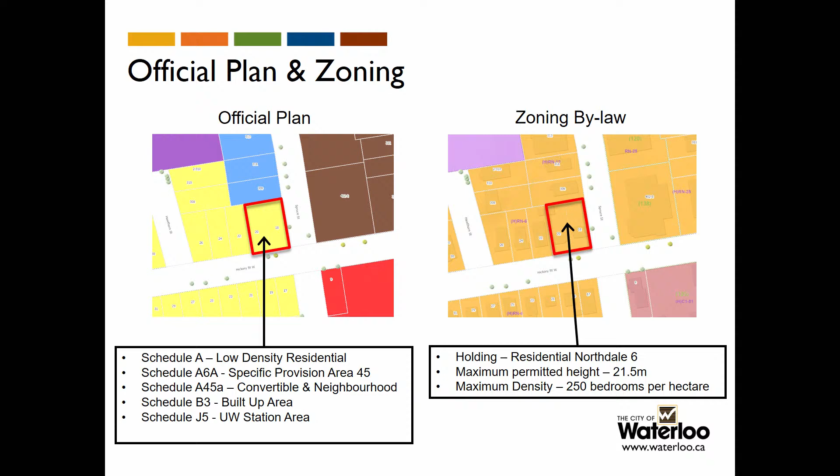In regards to the proposed development, the applicant is proposing to construct 9 3-story connected townhouses with 6 townhouses fronting Spruce Street and 3 townhouses fronting Hickory Street. The development contains 9 units with a total of 26 bedrooms. Each unit will have 3 bedrooms with the exception of 1, which will contain 2 bedrooms.

The applicant is proposing 9 vehicular parking spaces and 9 bicycle parking spaces. Vehicular parking is accessed from Hickory Street, and bicycle parking is located along the first unit fronting Hickory Street along the driveway. At the intersection of Hickory Street and Spruce Street, there will be an outdoor amenity and landscape area for residents of the development.

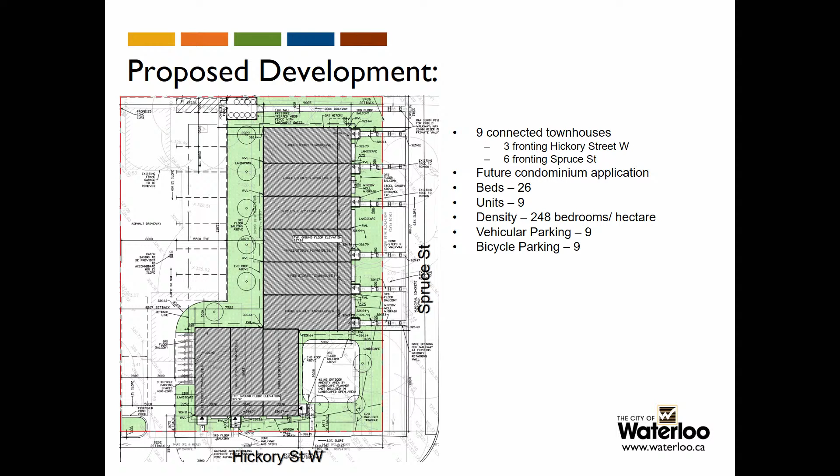In order to facilitate the proposed development, the applicant is seeking 4 site-specific zoning exemptions. 3 of the proposed amendments are technical in nature to recognize the configuration of the proposed development. My next few slides will explain each in detail.

The first amendment relates to the minimum street line setback for a convertible frontage. This amendment is technical in nature due to staff's interpretation of building facade, which speaks to the exterior wall or face of the building abutting a front or flankage yard. Based on the residential Northdale 6 zoning, the development is required to have a minimum of 75% of the front building facade be within 5 meters of the street line for a convertible frontage.

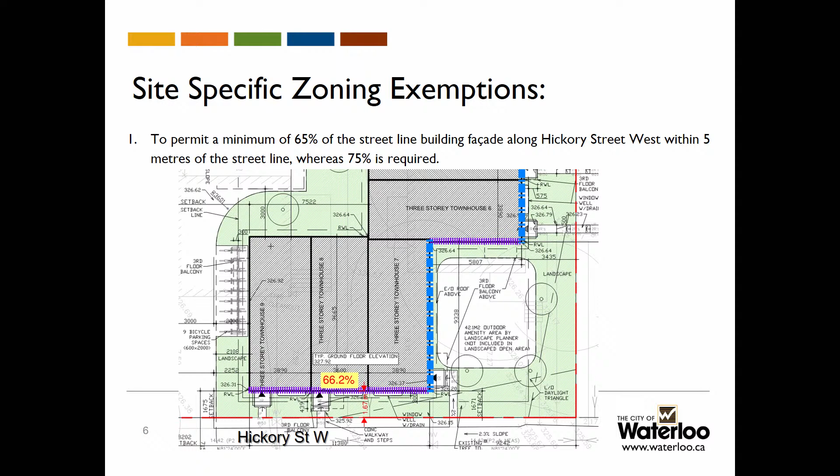In the image on screen, you can see staff have identified the front building facade along Hickory Street in a purple dashed line. Since the units are connected, the applicant is proposing 66.2% of the front building facade be within 5 meters, with the remaining 33.8% setback approximately 11 meters. The intent of this provision, in part, is to ensure that the street line is activated and that functional site requirements such as parking, garbage storage are located interior to the site. Hickory Street will continue to be activated as each of the units have their primary entrance from the street in addition to the outdoor amenity area.

The second amendment relates to the maximum street line setback for a neighborhood frontage. Similar to the previous provision, this amendment is technical in nature due to the townhouses being connected. The RN6 zone has a maximum street line setback for a neighborhood frontage of 6 meters. In the image on screen, you can see staff identified the setback along Spruce Street in a blue dashed line. The townhouses fronting Spruce Street meet this provision. However, the townhouses fronting Hickory Street with the exterior wall do not comply.

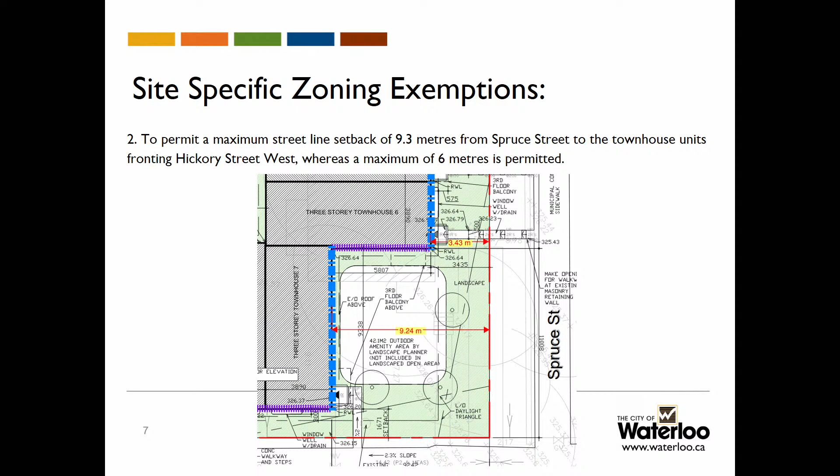The intent of this provision, similar to the other, is to ensure that the street line is activated and that the functional site elements are located interior to the site, such as the parking and the garbage. Spruce Street will continue to be activated as each of the units have their primary entrance from the street, in addition to the outdoor area as well. The third amendment relates to the first story height.

The RN6 zone requires a minimum first story height of 4 meters, whereas the applicant is proposing a minimum first story height of 2.7 meters, or approximately 8 feet. The intent of the minimum first story height is to allow for mixed use buildings or convertible spaces on the ground floor. As the applicant is proposing strictly residential, a 4 meter first story height, which equates to approximately 13 feet, is not required. Staff do not object to this amendment given the small scale nature of the proposed residential townhouse development.

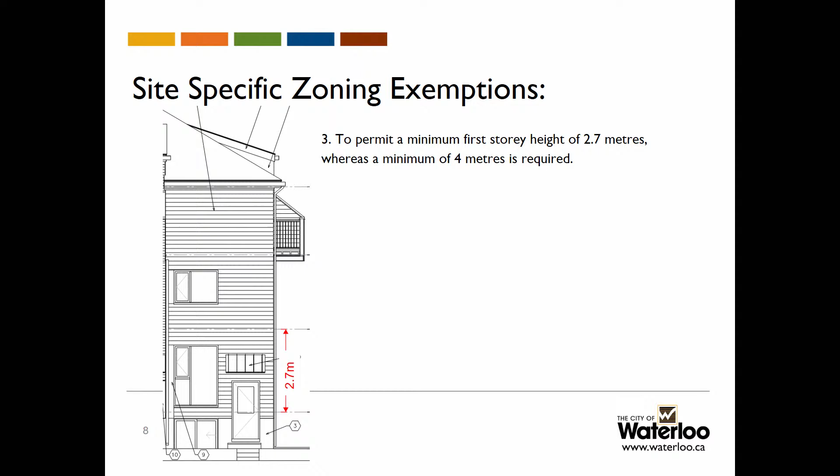The fourth and final amendment relates to the townhouses being connected. The definition of townhouse within the zoning bylaw restricts blocks of townhouses to a maximum of 6. The intent of this regulation in part is to address massing, facilitate articulated roof lines, facilitate access to rear yards, and to increase opportunities for landscaping.

The general intent of this regulation is maintained, given the design and configuration of the proposed townhouse development. From each of the streets, the development will not read as 9 connected units. Rather, it will be seen as 3 townhouse units from Hickory Street West and 6 townhouses from Spruce Street. The proposed building orientation creates an opportunity for private outdoor amenity at the intersection, which adds to the visual divide between the 3 and 6 units. The L-shaped building allows for the screening of vehicular parking spaces from the street. Staff do not object to this amendment, given the small-scale nature of the proposed development.

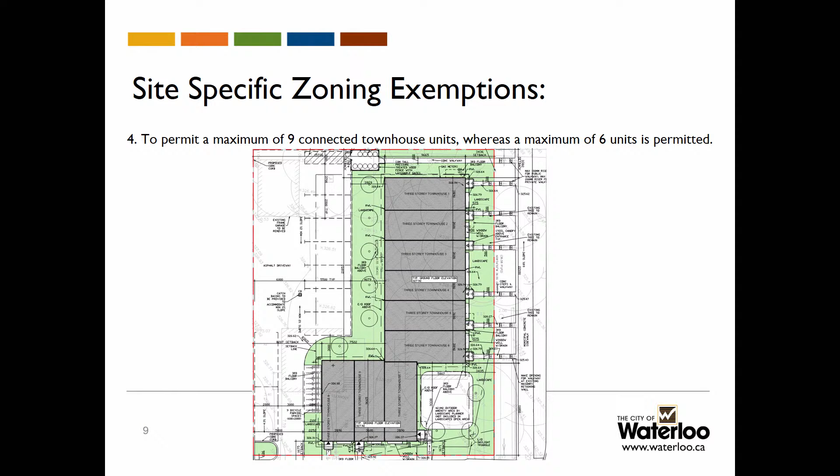In regards to my recommendation, staff are recommending approval of Staff Report IPPW 2024-039. Staff are also recommending approval of Zoning Bylaw Amendment Z2411, amending Zoning Bylaw 2018-050 by removing the holding on the subject lands. Staff are also recommending the Zoning Bylaw 2018-050 be amended by adding site-specific provision C269 to Schedule C and Schedule C1 for the lands known as 18 and 20 Hickory Street. I'm happy to answer any questions the council may have.

Does council have any questions of staff? Councillor Rowe. Through you, Chair, thank you so much, Amanda. I actually have a question for Bob Henderson, if I may.

I'm wondering about traffic on that street. Hold on, let me get the exact question. I'm wondering about overflow street parking and pedestrian safety crossing at Hickory and Spruce, and if there's any concerns about that, with the addition of the 9 cars in that area.

Through you, Chair, to Councillor Rowe. Staff have confirmed that the proposed parking on this site meets or exceeds the current zoning bylaw requirements, so staff have no concerns in that regard. As for the intersection operations and pedestrian safety, staff have also reviewed the intersection operation and looked for any cues of any issues with pedestrian safety, and staff are confident that the intersection is operating well in that regard.

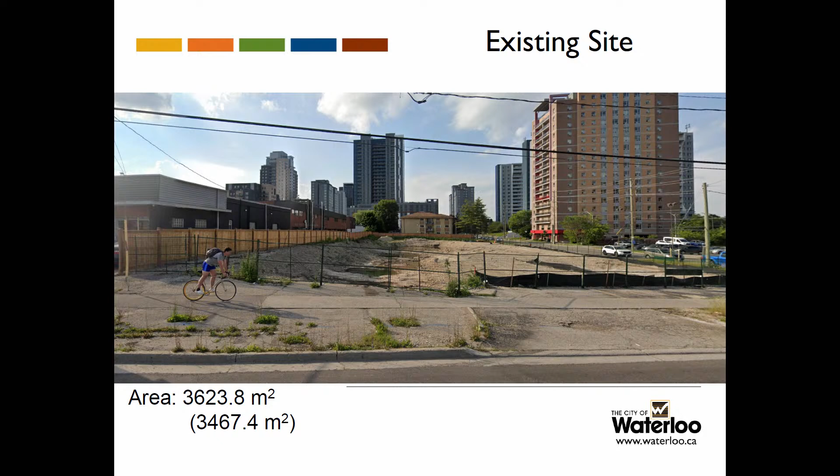The site is located on the corner of University Avenue East and Regina Street North. It was formerly a commercial site, kind of a vehicle service commercial site. The existing building has since been demolished and the site is currently vacant. It is approximately 3,600 square meters in size, and the applicant is proposing to construct a new mixed-use development on the subject property.

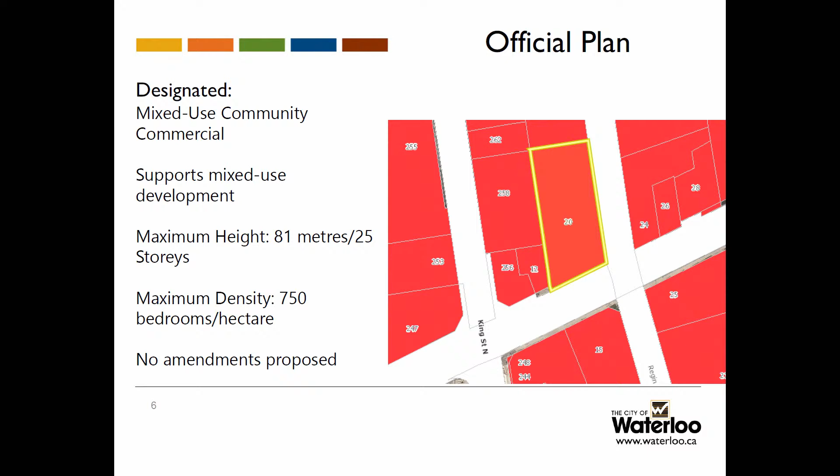The official plan designates the site as mixed-use community commercial. This designation supports mixed-use development and allows for a maximum height of 81 meters as well as 25 stories and a maximum density of 750 bedrooms per hectare. The proposal from the applicant is consistent with the official plan, so no official plan amendments have been proposed or are required. The zoning bylaw is mixed-use community commercial, C1-81.

It has a holding provision placed on the property via site-specific exception C159, and that holding provision is one of the requests that the applicant has come to request removing, which is required prior to development. The zoning bylaw also, similar to the OP, has a maximum height of 81 meters, 25 stories, and maximum density of 750 bedrooms per hectare, which equates to the 260 bedrooms being proposed. Permitted uses are a variety of commercial uses and residential within a mixed-use building, which is what the applicant is proposing.

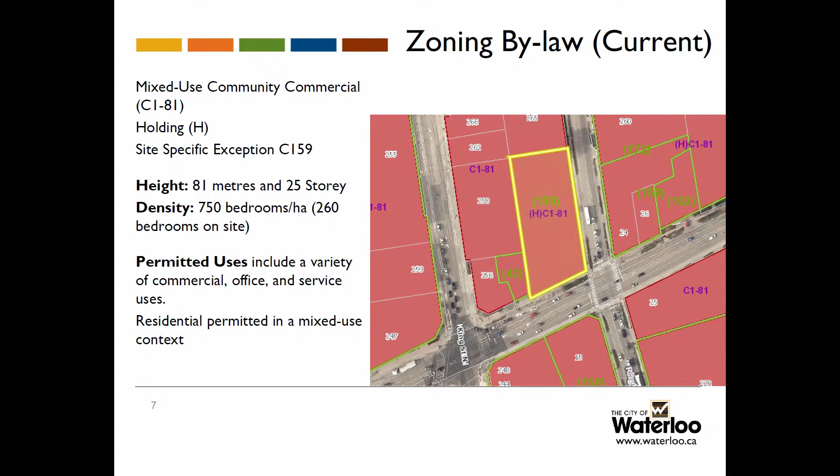To facilitate the development, however, the applicant has requested a number of site-specific amendments. First, the zoning bylaw requires a minimum tower separation from an interior lot line of 11 meters. They're proposing 10.5 meters from the westerly lot line.

The initial submission of this application had the building a little bit closer to Regina Street. They were asking for a reduction on the street line setback. Staff weren't in favor of that, and so going back and forth, one of the solutions was to pull the building back a little bit farther from Regina, maintaining that 5-meter setback. But as a result, they lost about half a meter on that westerly property line, so there is a very minor amendment of 0.5 of a meter on that interior tower separation.

In addition, the zoning bylaw requires a 3-meter step back from the tower above the podium. For the most part, the building does comply with this, but the main entrance on Regina Street is slightly recessed, and the podium recesses a little bit there, so in that small portion it is only a 0-meter stepback. Staff are supportive of this; it's very minor and adds a bit of articulation to the facade, as well as creating a recessed entrance for weather protection for people using the building.

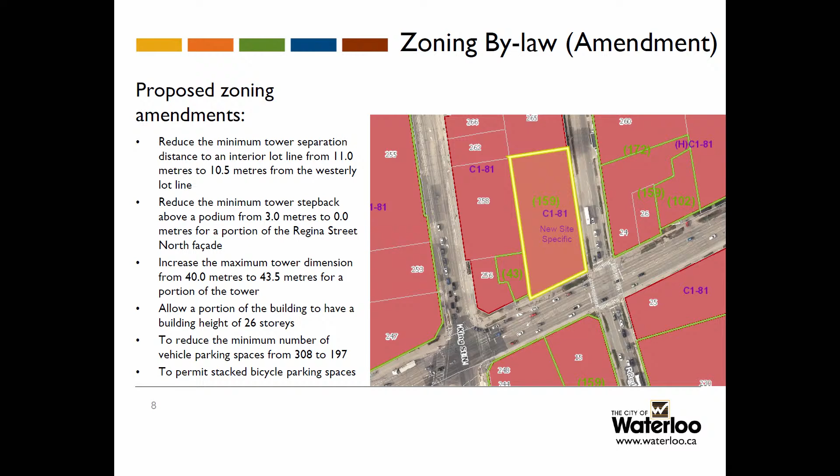A number of reports and studies were submitted that staff reviewed as part of this application. In general, staff is now satisfied, and we recommend that staff report IPPW 2024-043 be approved, as well as zoning bylaw amendment Z2303 to add the site-specific exception for the site, as well as to remove the holding provision on the site. I'm happy to answer any questions.

Thanks, Tristan. Does council have questions for Tristan?

Councillor Rowe: Through you, Chair, thank you so much, Tristan. I'm actually going to go back to Bob and ask another question. I'm wondering, Bob, about the intersection of Columbia and Regina, and if that location's on your radar for monitoring or mitigating any issues with this development, or perhaps anything else that's of concern.

Through Chair Vasic to Councillor Rowe: Thank you for the question. Staff are aware of the intersection of Columbia and Regina. Staff have identified it as an intersection that will be in need of safety improvements. We have a report coming in November as part of our network screening, traffic collisions countermeasures report, and it will speak to possible recommendations for the intersection for improvements in safety there. But as for the development contributing to a degradation of safety at that intersection, when we looked at the traffic impact study, there's very little development-related traffic assigned to that intersection, so it would be very difficult for us to say that this development would contribute to any degradation in safety. So it is an issue we've identified now, but as for development-related issues, we can't say that it will impact the intersection.

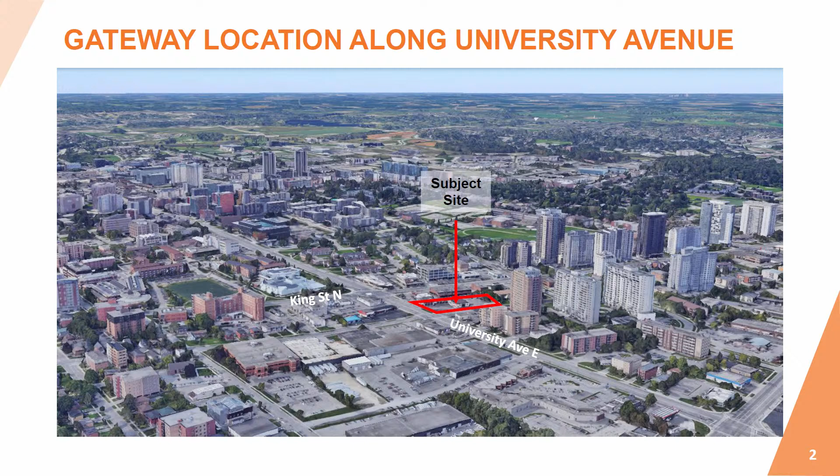Very important gateway site, north side of University Avenue, just east of King Street. This is an important hub and concentration, a higher density node planned in the city. We have Wilfrid Laurier University, a concentration of higher density residential development, but also employment opportunities and commercial amenities - it's a really important node in the city. Highlighted here is where that major node has been identified, where you're seeing permission as of right for 25 stories at 750 bedrooms per hectare. A very important node, supported well by public transit, active transportation, as well as institutional amenities and commercial services in proximity to the area.

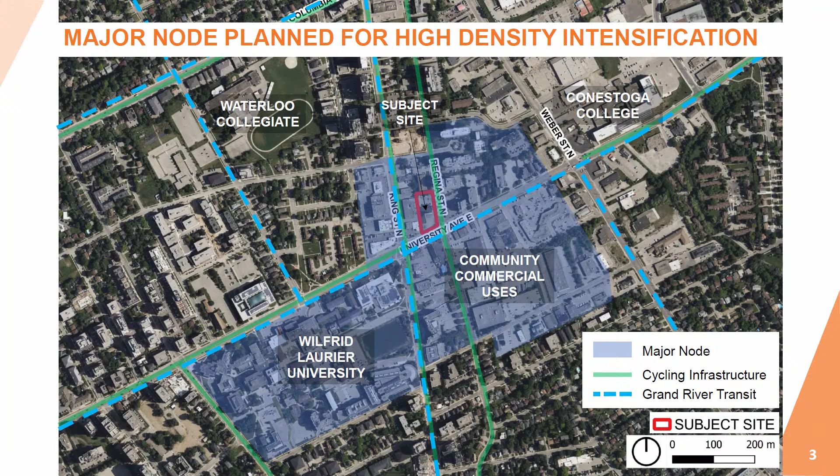As a result of that prior use, there was some subsurface soil and groundwater contamination, and the groundwater contamination in particular is why the region was concerned and took a conservative and cautious approach regarding any potential geothermal wells here. So we had to pivot a little bit, but that's fine. I can speak more towards the other sustainability initiatives a little later on. But clearly the site isn't fully optimized or leveraged for what's planned as an important high-density node in an important part of the city.

In terms of the proposal, as Tristan mentioned, 25 stories, 260 units. I'll specifically highlight a very meaningful commercial component, about 7,000 square feet or so. In a subsequent slide, I'll show how the commercial space along University Avenue occupies the entire frontage at the ground floor, as well as the majority of the Regina Street frontage. We're really trying to create an active streetscape and an inviting environment here, with large patio spaces out front lining the streets, trying to make this an active destination for pedestrians and cyclists along University Avenue or Regina Street.

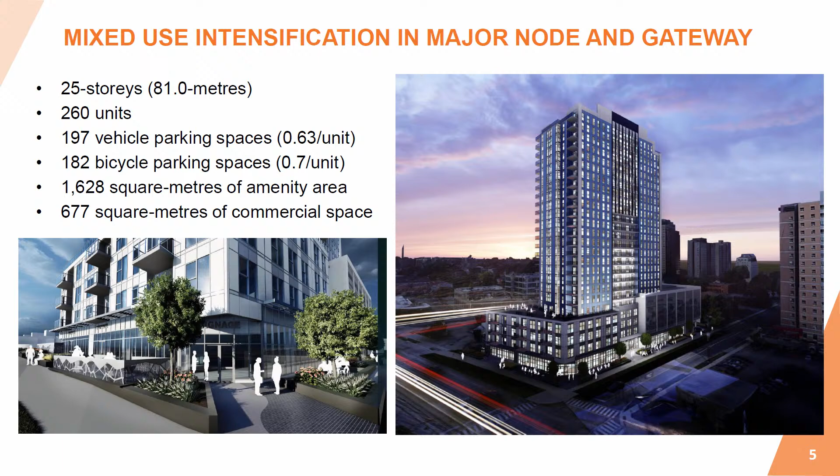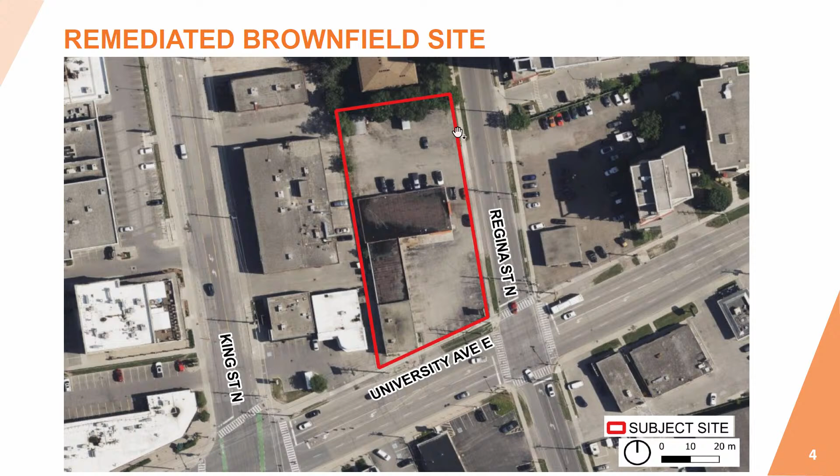In terms of some of the other benefits of this proposal, the previous use had a very long driveway access along Regina Street that occupied over half of the frontage, probably measuring 20 or 30 meters in length. They also had a driveway access onto University Avenue. In this proposal, we'll be consolidating that into one driveway, placed as far from University Avenue as we could, to prioritize pedestrian access and public transit over vehicular access.

If you've been by the site recently, you've noticed, and from Tristan's photo as well, there was some remediation work that the owner has already undertaken to get this site shovel ready. The plan is to begin construction as soon as possible in 2025, or perhaps even this year, given how we've bumped around with different planning applications as we collaborated with staff. There has already been a pretty thorough site plan review, so we're hoping to move forward very quickly. When we got the call from Tristan that staff were satisfied with the application and would bring a positive staff report, the owner immediately got started on working drawings for the building permit application. Everything's in the works to get this shovel in the ground as soon as possible. That's necessary to keep the pipeline of projects going and grow the applicant's already large housing portfolio.

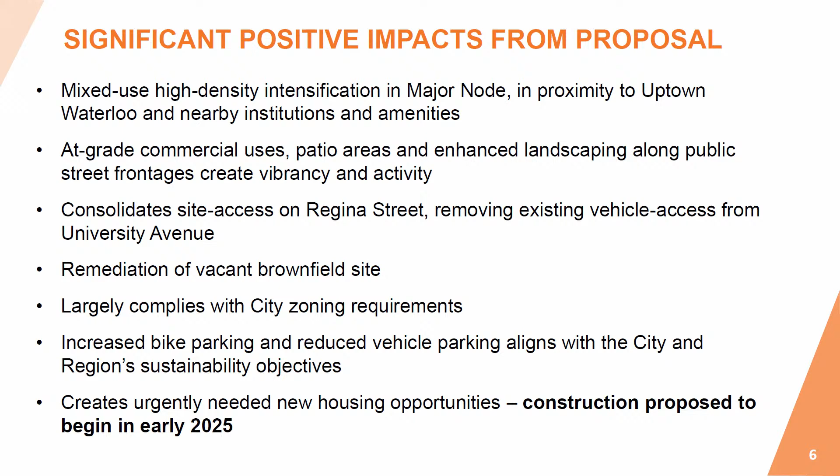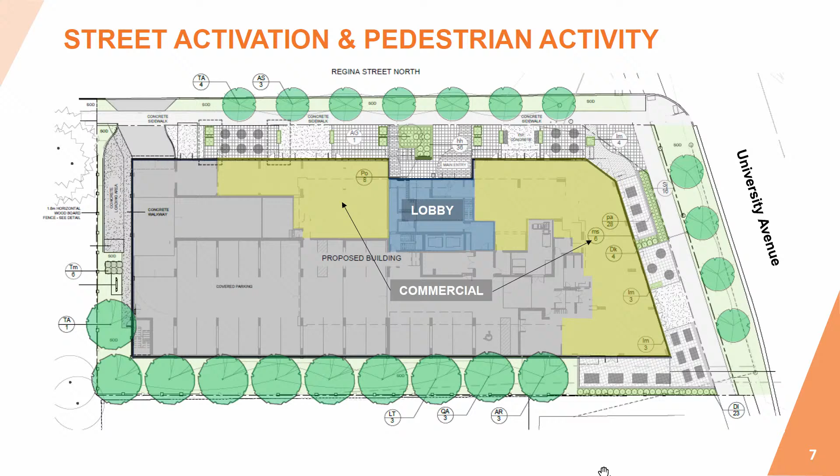Here you'll see all of the different patio spaces located out front of the commercial units to really create that vibrancy. And to proactively answer a question from the previous application, all of the trees are proposed with no structures underneath, so you have clear soil conditions underneath—soil volume is not a concern here. There isn't anything underground below these; they're all going to be in native soils, so no concern from a soil volume perspective. What we've tried to do is create a prominent street tree condition along both streets, and also provide trees around the exterior of the site, accommodating as much landscaping as possible.

I don't think I need to cover any more of the zoning bylaw details because Tristan did an excellent job of that. So I'll conclude by saying that I'd be happy to answer any questions you might have. Thank you.